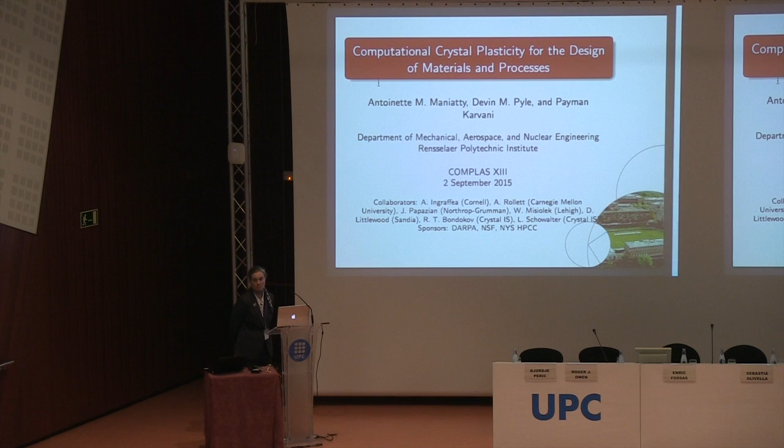I'm going to talk about some of the work we've been looking at, primarily in process design, but also thinking about design of materials. There were some nice talks earlier by Professor Reza and Professor Wing-Kam Liu about the relationship between processing and properties and microstructure, and that's very much in line with the types of work that we've been doing as well.

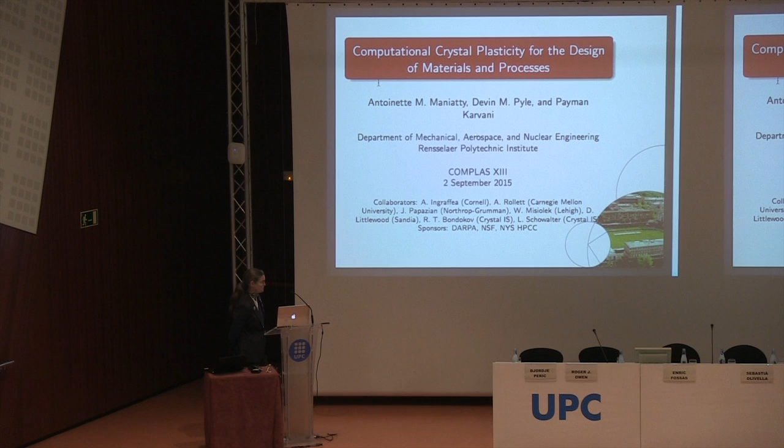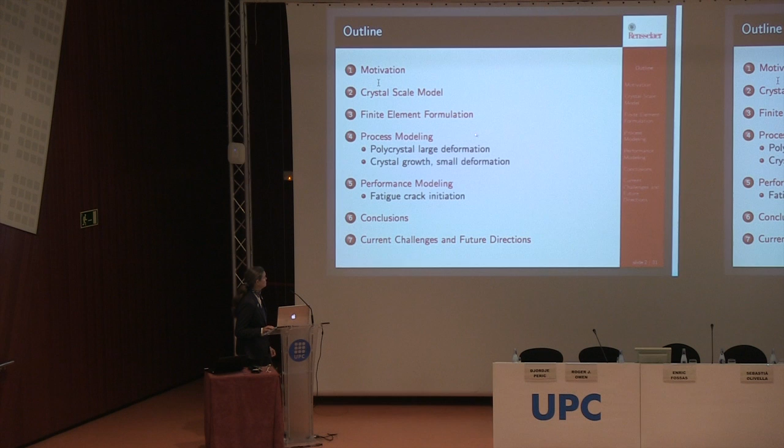So just a brief outline: I'm going to motivate the work here, although I don't think it needs much motivation for this audience. A little bit about the crystal scale model, finite element formulation. We'll give some examples in process modeling, similar to other work you've seen here, the classical processing of large deformation of polycrystalline materials, but also an example in the area of crystal growth where you have small deformations, but thermomechanical behavior and the plasticity and dislocation behavior is very important. And then, if I have time, talk some about performance modeling, fatigue crack initiation, and some conclusions, and my thoughts on current challenges and future directions.

As you know, to make a material or a product, you have to process it somehow to get the material into the geometry you want, and that processing may involve large deformations, certain types of heat treatment, so thermal mechanical processing, and that leaves you with some type of microstructure. The middle microstructure on the left side is your typical rolled polycrystalline material where you've got very elongated grains from the rolling process. That microstructure has a very large impact on the performance and service of that product.

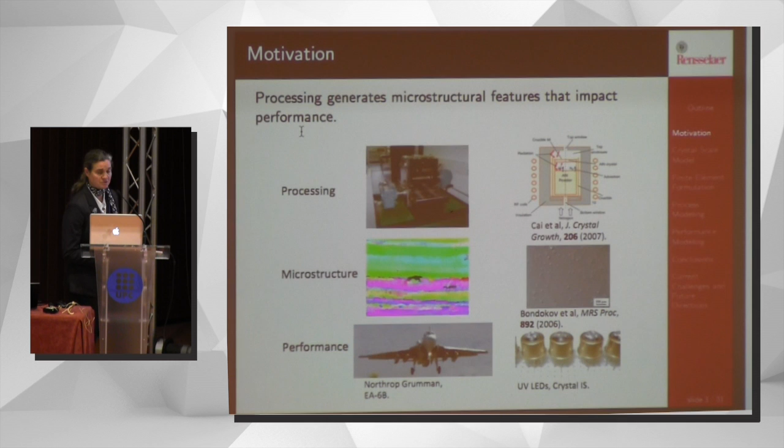On the right-hand side, we have a crystal growth process. This is for making single crystal aluminum nitride. It's a sublimation process. The material is evaporated and then condenses on a seed crystal that's on a crystal holder plate. Again, the process parameters, really the temperature field and also the material used for the crucible and the crystal holder, have a big impact on the properties of that crystal and how it's going to perform in service. In this case, aluminum nitride is used in ultraviolet LEDs.

So, again, just summarizing: process modeling predicts microstructure features and defects, and that may be used to guide process design. The other thing we're going to look at is understanding, through modeling and simulation, the relationship between the microstructure and the performance, and that can be used to guide materials design. So that's been a motivation for much of my work, and probably many of you as well.

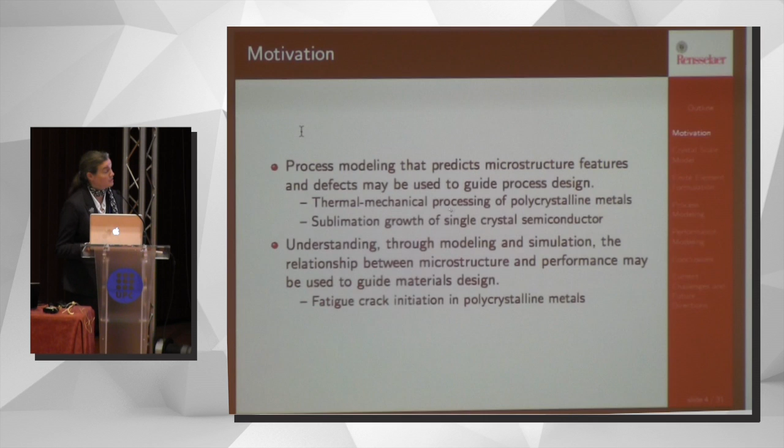So at the crystal scale, if we're thinking about a polycrystalline material, but it could also be a single crystal, you could look at any given crystal, and it has some lattice. And we assume that the deformation gradient obeys a multiplicative decomposition into the thermal, elastic, and plastic behavior or components.

The plastic part, which is probably the most interesting part, we assume is associated with slip along crystallographic slip systems. So the plastic velocity gradient is a sum over all the slip systems of the rate of shearing on each slip system, gamma dot alpha, times the Schmid tensor, p hat alpha. Hat indicates on the lattice configuration. That Schmid tensor is the dyadic product of the slip direction and the slip plane normal.

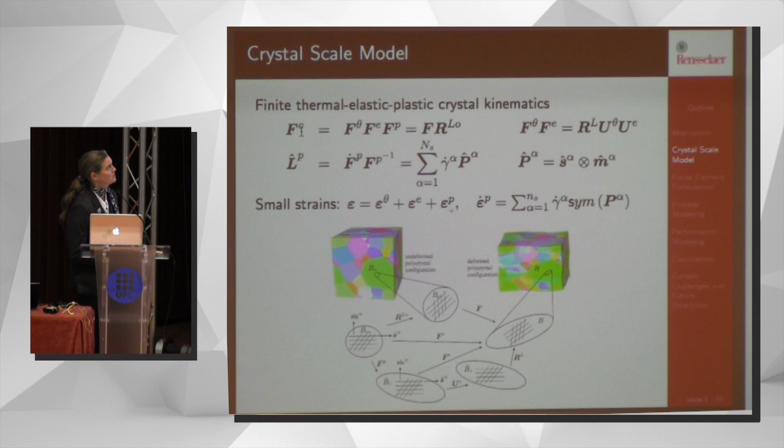For small strains, if we're doing a small strain analysis, we do an additive decomposition of the small strain tensor, but our plastic strain rate has a similar form to the plastic velocity gradient, where now we're looking at the symmetric part. The anti-symmetric part, of course, is associated with the lattice rotation due to plastic straining.

So elastic behavior, fairly straightforward. We assume a linear relationship. The elastic strains in these materials is typically very small, so a linear relationship is, for the problems we're looking at, quite reasonable. It's in the plastic deformation that the really interesting stuff happens. And that's why I can keep working on the same stuff for more than 20 years and still not really know what I'm doing. Because plasticity, as I tell everybody, is hard.

So really, dislocations are the heart of everything in plasticity, at least when you're looking at crystals. So I start with the Orowan equation. The rate of shearing on the slip system is the mobile dislocation density, rho m, times the Burgers vector for that dislocation type, times the dislocation velocity on that slip system, v alpha. That's an average dislocation velocity.

And that dislocation velocity, v alpha, I assume follows a dislocation glide power law relationship, with an Arrhenius term that gives us our temperature dependence. Theta is the temperature, Q is an activation energy for dislocation glide. Tau alpha is our driving stress, the resolved shear stress on the slip system. And tau hat alpha, eta in this case, is the resistance to slip. I use eta here because eta is associated with the slip system type. So I'll talk a little bit more about that on the next slide.

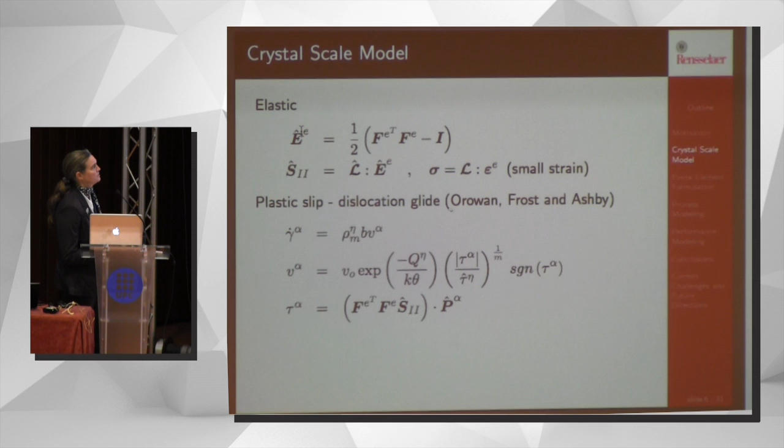So the hard part of plasticity is how these dislocations form and interact with each other. Now, the mobile dislocations are assisting plastic glide. You have to have a certain number of them for the glide to happen easily. If you don't have them, the material behaves somewhat brittly. The forest dislocations, the ones that are immobilized, are the ones that are hindering plastic deformation.

So I'm going to give just examples. These are some typical types of constitutive models that we've been using for modeling the mobile and immobile dislocations, or the hardening, if you like, in our work. But there are many, many models out there with different levels of complexity. I would say this is maybe a medium to low level of complexity. We're doing some homogenization. We're not considering all the details of the dislocation types and every possible interaction, but we're kind of averaging it out using some phenomenological ideas.

So for dislocation entanglement hardening, this work is based on classic work of Kubin and Estrin, and more recently by Beyerlein and Tome on hexagonal materials. So we have our resistance to slip, tau hat, with some friction component, which we assume is fixed, plus some evolving component that's related to the forest dislocation density rho f, that being associated with obstacle spacing.

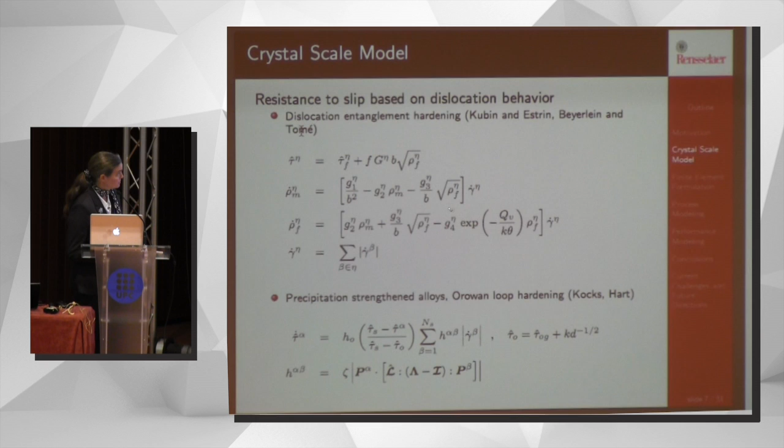We've also done some work looking at precipitation strengthened alloys. This involves the dislocations forming loops about particles, or precipitates to be specific, and of course those are there to give the material more strength. I'm not going to go into the details of the equation here right now, but conceptually what's interesting in the difference between entanglement hardening and precipitation hardening is that in entanglement hardening, the latent hardening, the hardening on slip systems that are not slipping, is higher or equal to the hardening on the slip system that you're slipping on.

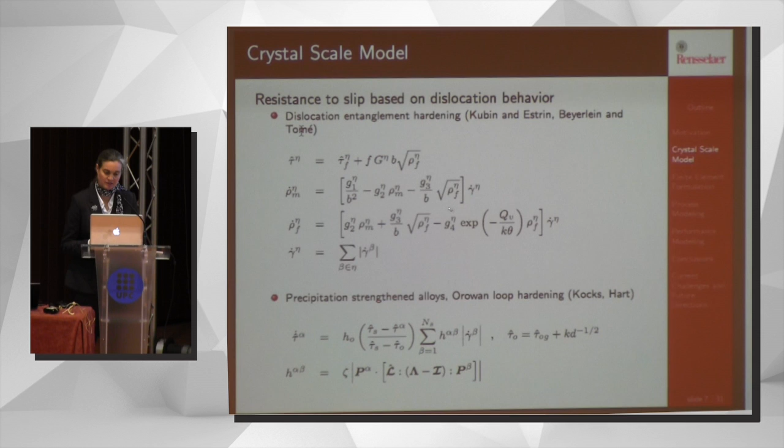So what happens is that the slipping tends to concentrate on the slip system that you start slipping on, so you get localized slip. When you have precipitation strengthening, the self-hardening is actually higher than the latent hardening. So once you start slipping on one slip system, the slip tends to move on to a

different slip system, and so you get more different slip systems active and also a more diffuse plasticity. We take these equations and implement them in finite elements so that we can solve on polycrystals or single crystals.

Just some highlights of the implementation: we have both finite and small strain implementations, using a 3D mixed formulation. We've implemented it as a stabilized formulation where we interpolate both the displacements and the pressures with linear tetrahedral elements, and we also have one with quadratic tetrahedral interpolation on the displacement and linear on the pressure.

The stabilized formulation gives us very good results at much lower computation costs, so that was the motivation for doing that.

It's implicit with consistent tangent, parallel implementation. For doing our parallel solves, we use PETSc and MPICH from the Argonne National Lab. We have periodic boundary conditions, and you'll see some of the examples show periodic boundaries.

And we run our simulations on the BlueGene/Q at RPI's Center for Computational Innovation, CCI. That computer is called AMOS, which stands for Advanced Multiprocessor Optimized System.

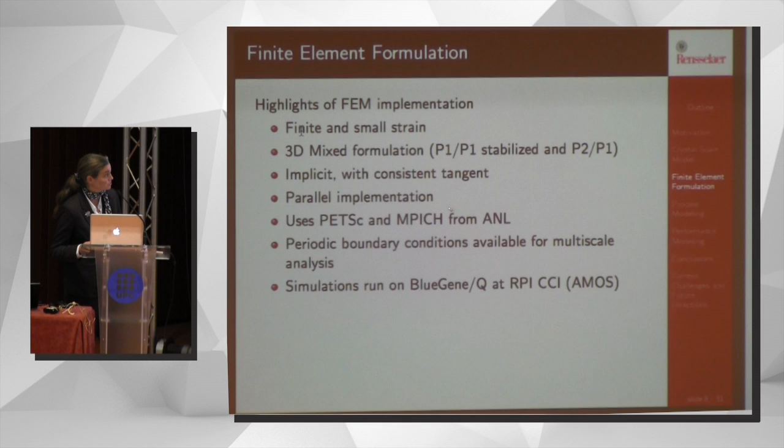AMOS also happened to be the first name of the first professor at RPI, who was one of the co-founders of our institute, Amos Eaton. We're a fairly small school, not as big as UT Austin, but in the Northeast we have one of the largest supercomputing facilities at an academic institution, and we were the largest at one time. So we have very nice computational facilities at our institution.

So I mentioned the stabilized formulation. Since Tom Hughes was here earlier, I figured I'd better say a little bit about that, since it's based on his earlier work.

So this is the finite deformation implementation. We have the divergence of our first Piola-Kirchhoff stress equal to zero, and we split it into the deviatoric and hydrostatic parts.

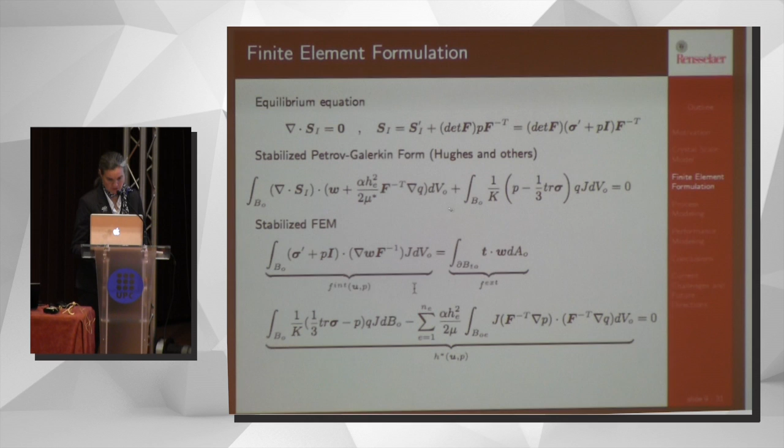So we have our usual weak form where we enhance our trial function with this term here. It's very similar to the work of Hughes and others. When we go through and derive our weak form, integrate by parts, and so on, we end up with a formulation that looks like this when you have linear elements for the pressure and displacement field.

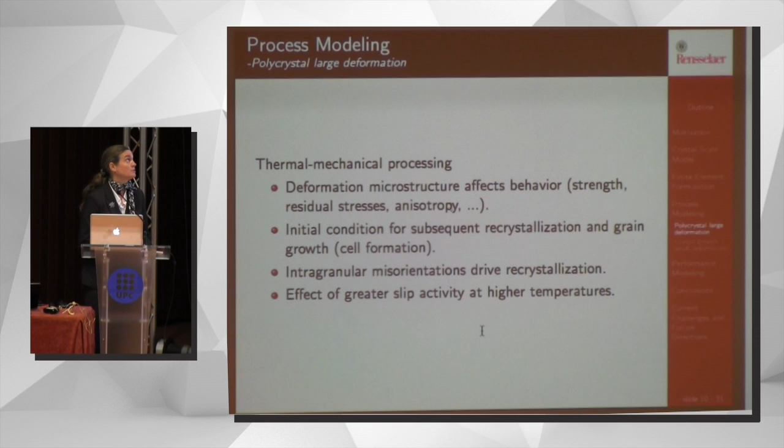Okay, so let's show some results. In thermomechanical processing, we're interested in getting the deformation microstructure because that affects the behavior, the strength, the anisotropy, fatigue resistance, as we'll see later when we look at performance, and the residual stresses at the microscale.

What's really interesting is at the microscale we usually see several hundred megapascal differences in the stresses, so you get huge local residual stresses that drive subsequent recrystallization and grain growth. We also see cell formation, which is interesting, and when I show the results you'll see some of that. It's these intragranular misorientations that, in addition to the residual stresses, drive recrystallization.

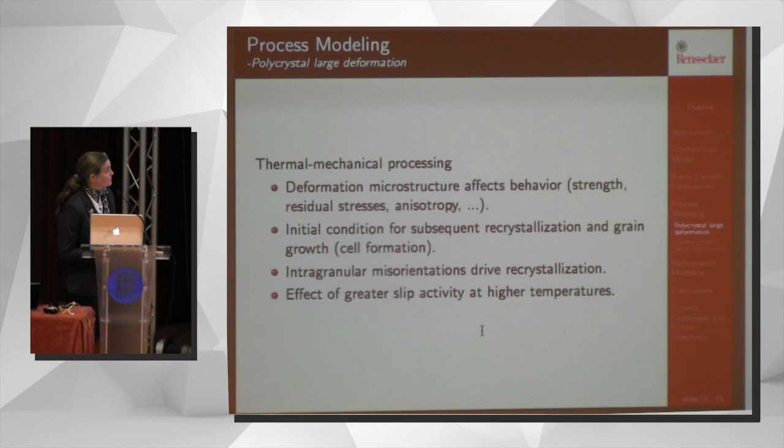The other thing we look at is the effect of greater slip activity at higher temperatures. For microstructure evolution, here we're looking at aluminum alloy 7075, T651.

This is a model with 107 grains as a periodic microstructure, submitted to plane strain compression to simulate rolling to a 20% reduction at room temperature. So we have the initial homogenized grain structure, and on the right we see the grain structure after deformation.

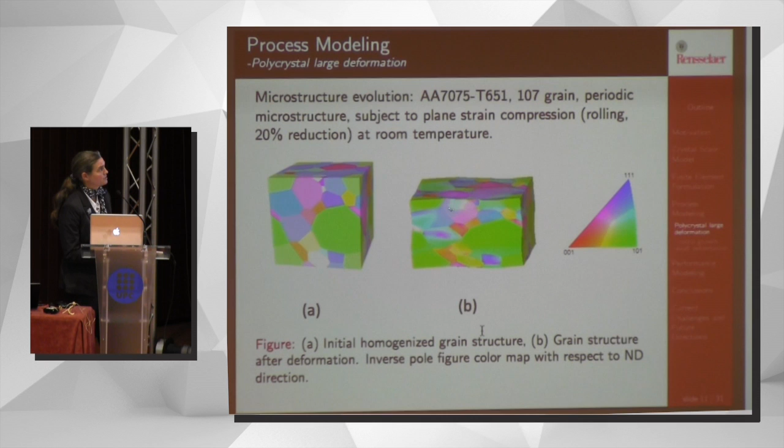Now the colors here are associated with the orientations, with our legend shown there. Initially each grain has a single color in it, but after deformation we start to get a range of colors. For example, here we get this white region forming inside of this originally purple grain.

Likewise, over here we see this light blue region and this darker blue region, with this purple region forming inside of it. So the grains are breaking up, and those new grains would have misorientation as we go from one region to the next.

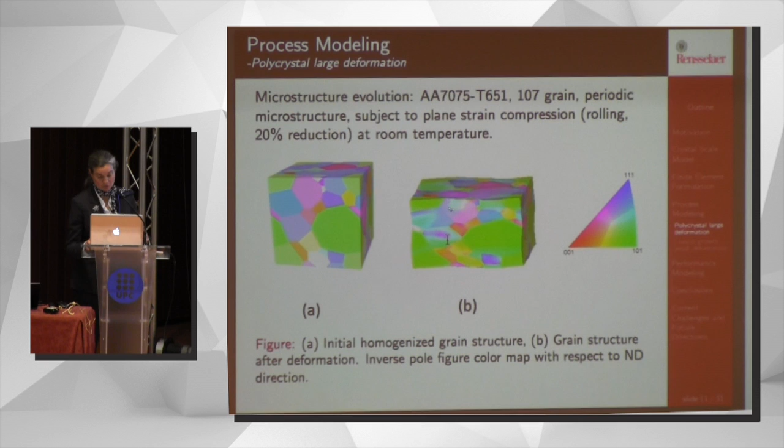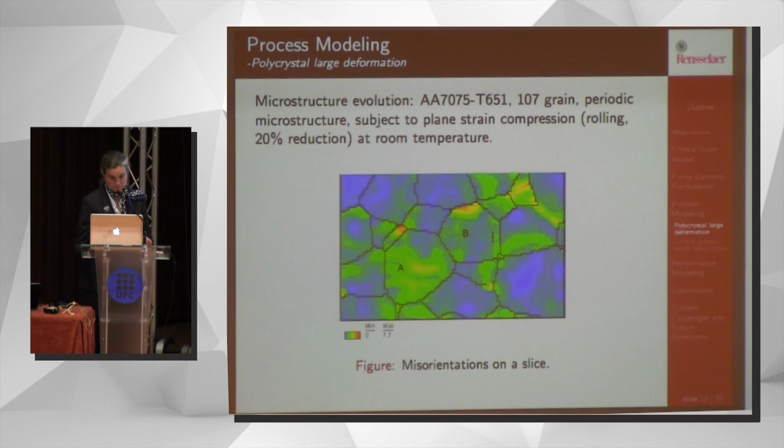We also see interior misorientations. Probably our simulation smears that out some. We don't have experiments that go along with this, but I think in practice you would see this to be more focused, not as diffuse.

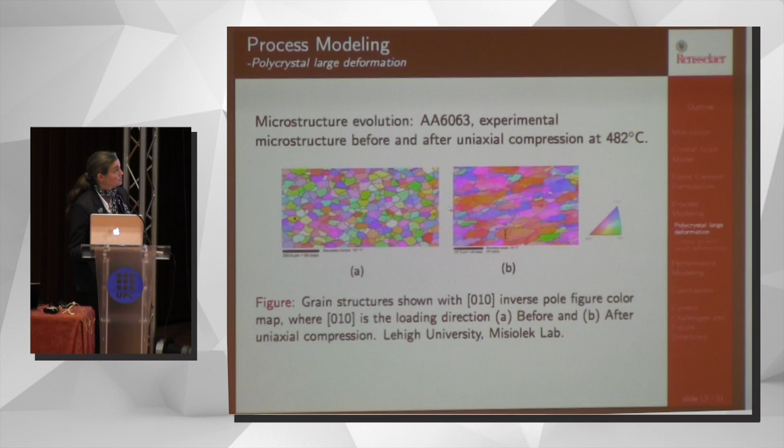After a compression deformation, we see that the grains are becoming elongated because of the deformation. We start to see some coloration variations within the grains due to intragranular misorientations, and we also see that certain colors are more predominant than others.

Here's a simulation of a polycrystal at 482 degrees C. What's interesting is at this temperature, you not only have the 12 octahedral slip systems active, but it's been observed that you see slip also on the cube slip systems and on these 45-degree slip systems. Perocheau and Driver did some very nice experimental work on this.

If we model it with just the 12 slip systems, which would correspond with room temperature deformation, we see a behavior like this, with more breaking up of the grains. You can also see greater heterogeneity in the deformation.

When we have 24 slip systems active, we see again evolution of the texture, but less misorientations within the grains, and also a more homogeneous deformation.

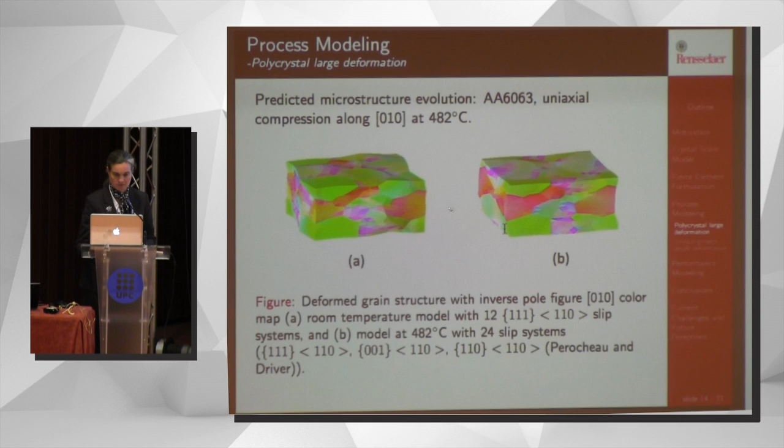What we were really interested in is that in subsequent recrystallization, the 001 orientation is the dominant one that appears. When you only consider 12 slip systems, you just don't see 001 orientations appearing after the deformation, and that's what we see here.

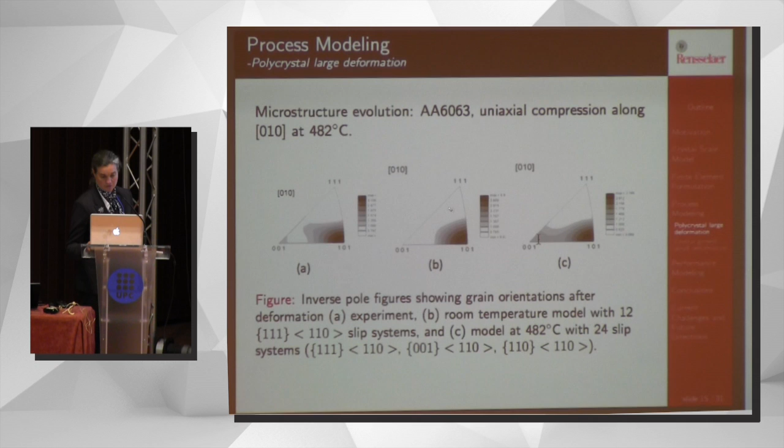But in the experiments, it's clear that there is a 001 component, which is a favorable orientation for nucleation of new grains and growth. We do get that orientation appearing when we include all 24 slip systems, so we see something closer to the experimental observation when we include those additional slip systems.

Just summarizing that section: crystal plasticity finite element modeling predicts to a certain degree cell formation, but the present model is not adequate for predicting dislocation patterning details.

There's been other very nice work by David Field and Mohammed Zbib at Washington State, and Arsenlis et al., who look at the individual dislocation types and are able to predict dislocation patterning by the details of those interactions, which we've kind of homogenized out in the formulation that I presented.

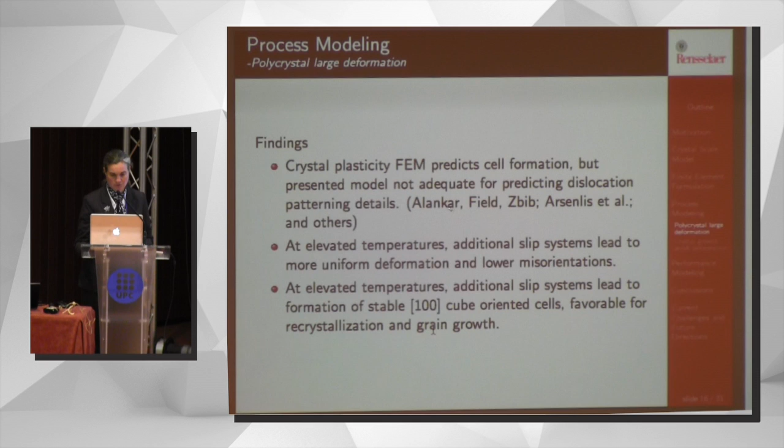The other thing we found was that at elevated temperatures, these additional slip systems lead to more uniform deformation and lower misorientations, and also the formation of a stable cube orientation favorable for recrystallization and grain growth. So adding those slip systems is important to predict the correct texture, if we wanted to link this up to some type of grain growth simulation.

The next example in process modeling that I want to talk about is aluminum nitride production. Single crystal aluminum nitride is well suited for high power and high frequency electronic and photonic devices. It's a very interesting material with very high bandgap.

When used in an LED, aluminum nitride creates ultraviolet light, and the frequency of that light is optimal for water and air disinfection, which could be used for water purification because of the low power requirements. It could be used in various situations, certainly in third world places, and also for municipal water supplies, which currently use mercury-based sources. This would be a cleaner, more efficient solution.

However, the cost of manufacturing aluminum nitride is still really high. That's mainly because there are two main competing methods to make it: epitaxial growth, which has a high dislocation density, versus bulk growth. My colleagues at Crystal IS have developed this sublimation process where they get a much lower dislocation density, on the order of 10 to the third per centimeter squared. It's very low dislocation density, which gives a very long service life and excellent performance.

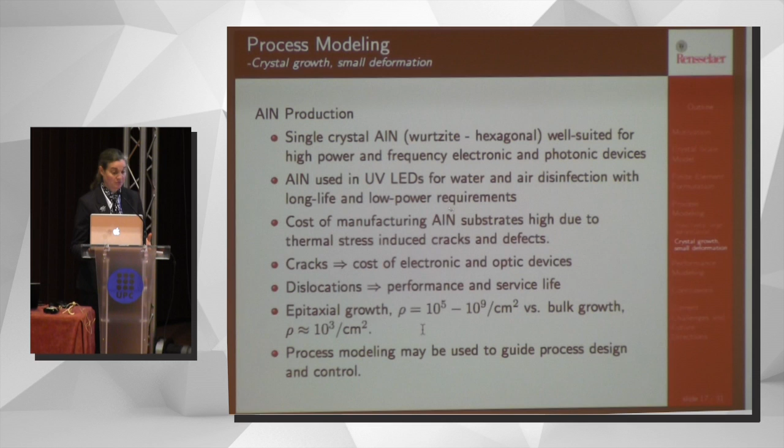The problem is, when you have this very low dislocation density, the material is pretty brittle, and they have a real problem in their process with the material cracking, with very high residual stresses. It's done at very high temperature, so they're interested in understanding this process, modeling it to understand the key factors causing that cracking, while also not wanting to introduce dislocations. So we wanted to develop models to guide the process design.

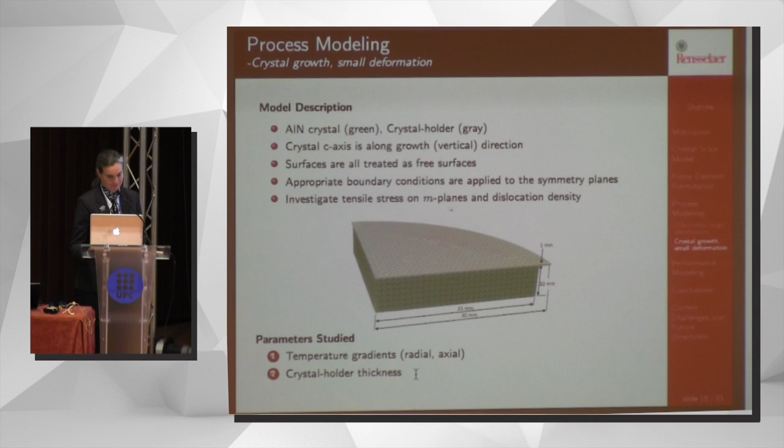We can see that it starts to grow a lot when we get a higher thermal expansion mismatch. Even though it seems fairly low, it has a very big impact. The people I was working with at Crystal IS did not think that was going to be important, but it turned out to be the most important thing.

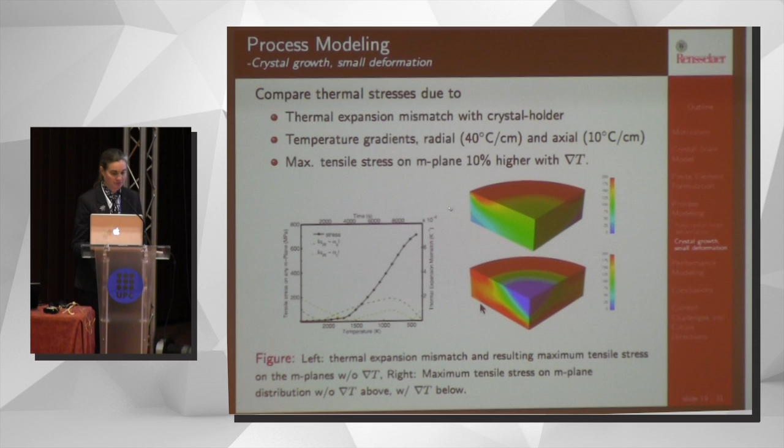But the temperature gradients also have an impact. We can see that we get this very high tensile stress on the M planes on the top of the crystal near the edges due to that thermal expansion mismatch. But when we have temperature gradients, we also see high stresses on the bottom of the crystal as well, and that correlates with the cleavage that they see.

We also looked at the dislocation density, and what we found was that the radial temperature gradient leads to dislocations on the prismatic planes at the outer radius and at the bottom. The thermal expansion mismatch, as one might expect, leads to dislocation concentration at the top crystal surface on the basal planes.

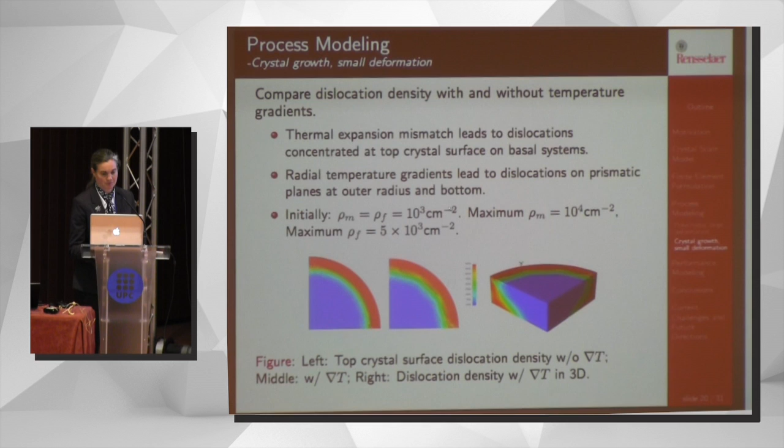The crystal holder thickness, we found, had a big impact, and by thinning it down, you could greatly reduce the stresses that lead to cracking.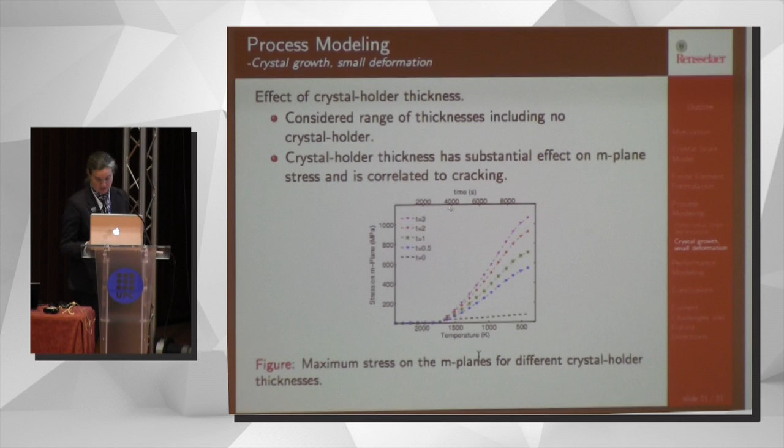In fact, they did experiments at Crystal IS where they varied the crystal holder thickness, and we see that as it goes down, from 4 times to 2 times to the original size, the stress on the M planes correlates very strongly with the percent of failure that they were seeing.

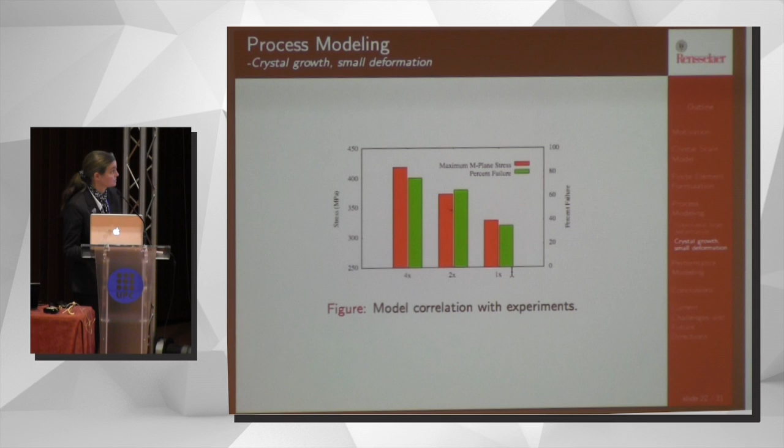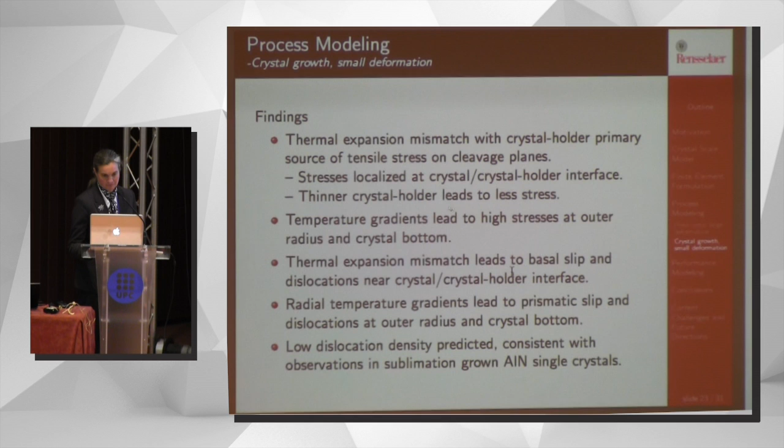Okay, we have to hurry up. Process modeling - I just went through all of that. Let me quickly talk about performance modeling.

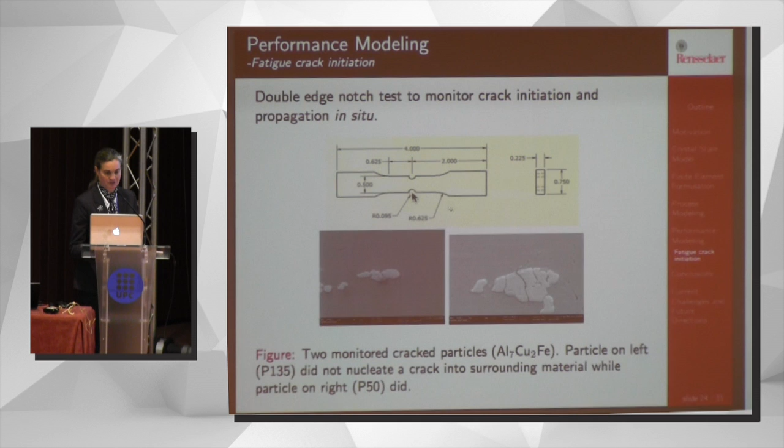This is looking at fatigue crack initiation in aluminum alloy 7075 T651. There was a double-edged notch experiment where they looked at second phase particles that tend to crack and lead to crack nucleation in the material, and they tracked a bunch of them.

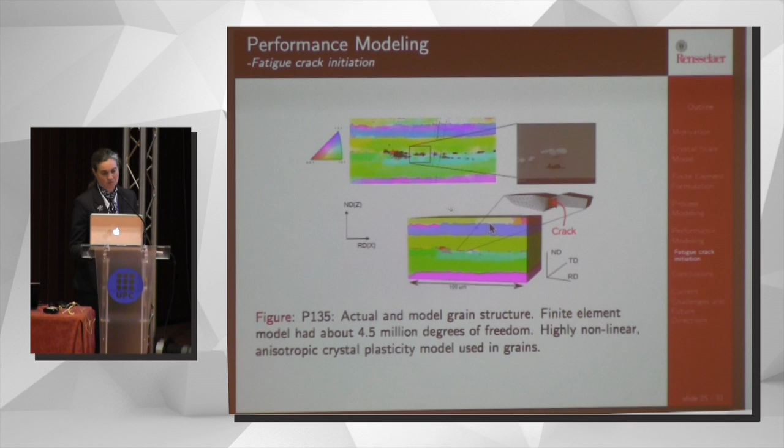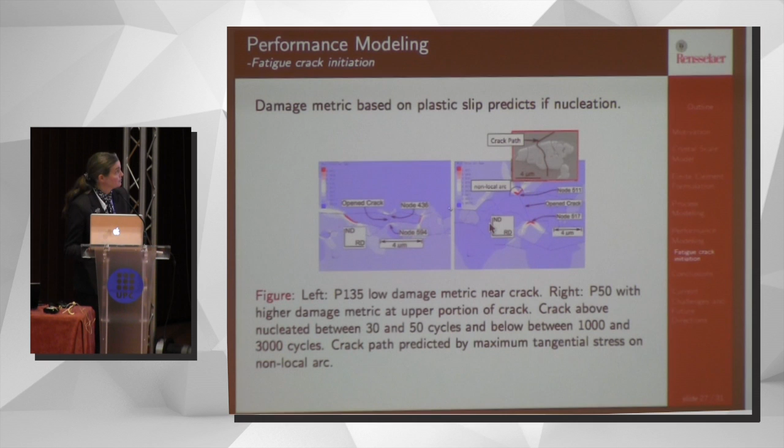Some of them nucleated cracks and some did not, so we simulated these. This is one where the crack did not nucleate into the surrounding material, and this is one that did. We developed a damage metric that seemed to be very predictive of determining whether or not the crack nucleated into the surrounding material.

The important thing is that we found this sort of relationship. Now, the experiment looked only every few cycles - they stopped the experiment and looked where the cracks were. So we know, for example, this one nucleated between 30 and 100 cycles, here between 10 and 30.

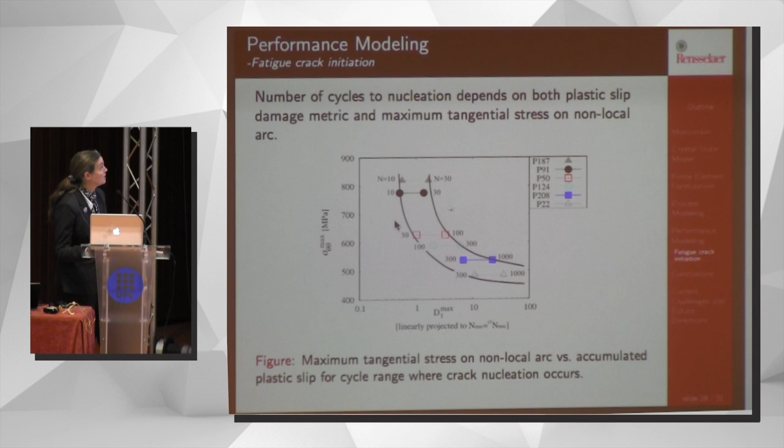The main thing that we found was that the number of cycles to nucleate depends on both the plastic slip damage metric and the maximum tangential stress on some non-local arc.

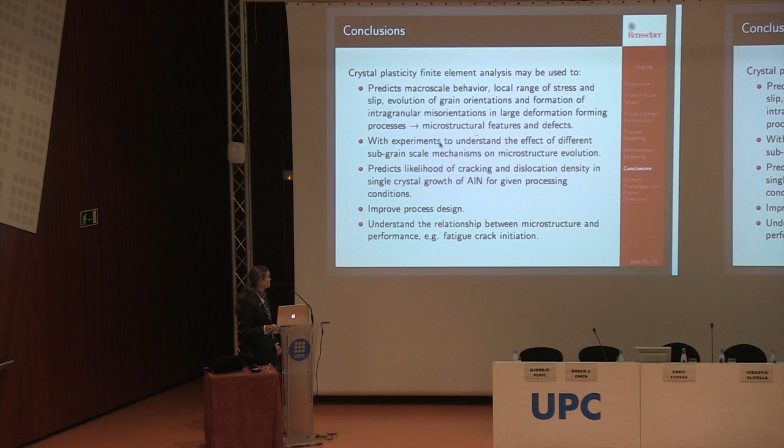With experiments, we can learn about the effect of different subgrain scale mechanisms on microstructure evolution, predict likelihood of cracking and dislocation density in aluminum nitride. This can be used for improving process design. We also used it to understand the relationship between microstructure and performance.

Just some things that I'm really interested in: there's really a need for more experiments at the subgrain scale. These are just starting to come on board. Early evidence shows discrepancy - even though we maybe get some of the statistics right, locally we're not exactly matching up the behavior. So better understanding of dislocation behavior, modeling that more accurately.

There's some good work coming on board on the experimental side that can help us improve our simulations. Grain boundary mechanisms - I don't have that in my model, but that's very important. And definitely there's a need for more stochastic analysis and development of stochastic models.

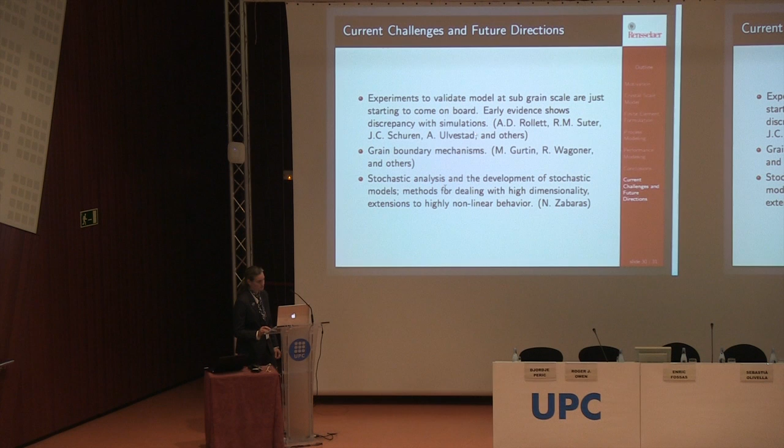So I'll be happy to answer questions.